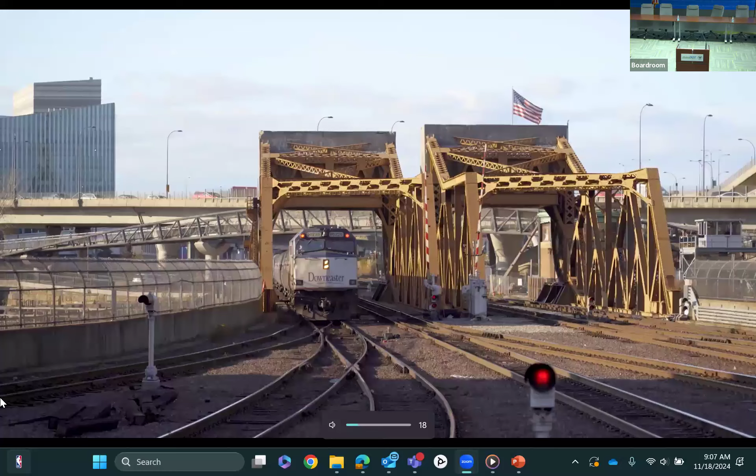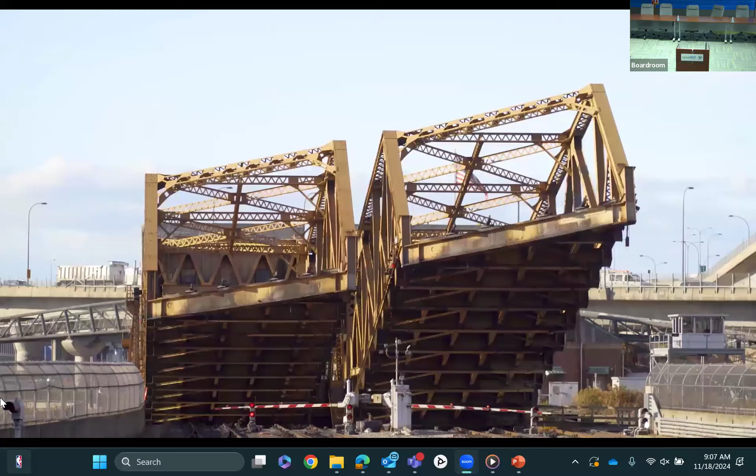Hi everyone, Phil Eng, MBTA General Manager. It's my pleasure to welcome everyone to the MBTA's Draw 1 Industry Forum. The North Station Draw 1 Bridge, right behind me here, connects the city of Boston and all the communities to the north. This roughly $1.2 billion project will be one of the largest infrastructure investments in recent MBTA history. It entails replacing the bridges, a control tower, extending the bridge platform, extending tracks to the existing network, and making various other upgrades that allow us to keep passenger service running while constructing. Today you'll hear presentations by Karl Eckstrom, MBTA Senior Director of Bridges and Tunnels. He will discuss the project in more detail, including our goals, our objectives, and the challenges that we will face together.

And we will answer your questions. More importantly, we want to hear from you. We want to learn from your past experiences in delivering similar sized, similar complex projects. And that feedback will help us develop strategies to ensure that we put out a project that can allow you to price and schedule this project accordingly.

I hope through this forum, partnerships will form from the contracting industry that will result in a better product for the MBTA and all of our riders that depend on our service to get them where they need to go safely and reliably. Thank you everyone for being here today.

My thanks to the GM. He's been a great advocate for this project. And speaking of which, one of our partners on the federal side of the house is the FTA. We have initiated a NEPA clearing for the documentation and also for the use of federal funds to help pay for this project. The FTA has been involved basically since day one with our team, talking through the challenges and the need to keep operations moving on one of the busiest stations in the Northeast.

I spend a lot of time at conferences and in meetings and speaking to groups like this about our vision for regional rail, our high-frequency, decarbonized system. And I talk a lot about electrification and power infrastructure and higher frequency and station projects. We can do all of that, and we will do all of that, but none of it amounts to a hill of beans on the north side if we don't do North Station Draw. That's the reason why it is the number one highest priority infrastructure project for the commuter rail system.

Just to give you some context, a third of our ridership and our train service is on the north side. It's 4 lines: the Fitchburg line, the Haverhill line, the Lowell line, and the Newburyport-Rockport line. It's about 160 trains per weekday out of the overall 500 trains we operate on commuter rail, and it's about 30,000 passengers per weekday.

Two of the highest ridership stations on the entire system, Salem and Beverly Depot, are on the north side. So this really is an existential piece of infrastructure that provides a gateway to the entire north side of our system to Boston. Without Draw 1, without a fully functioning operational Draw 1, we don't have a north side service. A lot of what you're going to hear about the design and the plan for the project involves replacing a critical asset.

It's also important for our plans with regional rail and higher frequency service that we increase the track capacity of Draw 1, so that even more trains in the future can utilize this critical asset to connect the north side to Boston.

Over time, our plans are to go from what's currently anywhere from 30-minute to 60-minute headways on the north side, to 20 to 30-minute headways system-wide. So you can do the simple math. Our vision in the next 10 to 15 years is to actually double the amount of trains going over Draw 1, and provide that level of service to the communities that depend on us for their commute.

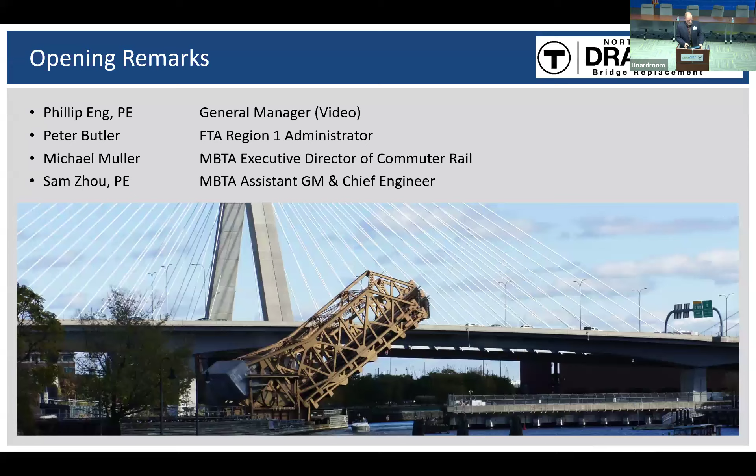For today's presentation, we'll do a quick look at the agenda. We'll talk about why this project is needed, you've heard some comments on that already. We'll talk about program goals, the project description. We'll look at some challenges. We'll talk about the funding that's in place for this job. We'll look at our NEPA review process, and then we'll talk a little bit about details for this afternoon's site tour and access to North Station.

Again, my name is Karl Eckstrom. I'm the MBTA project manager for this project. With me today for presentation purposes is Mark Ennis. Mark is the PM from STV, our design consultant for the bridge replacement. Their team consists of HNTB, the track and signals designer.

Bryan Engineering is the surveyor. We have TRC as an environmental consultant. City Point Partners / HDR is our public outreach consultant. And CNC is a DBE doing some structural computations and design efforts as well.

So we have a broad team, a lot of horsepower on the design side. I've been thankful to work with such a great group of professionals, and I want to thank them for helping us set this up today and the feedback that they're going to bring your way. So we'll get started. So why is it needed?

As Mike alluded to, this is the north side pinch point. Everything that comes into or out of Boston from that side comes across these two bridges. We have the Fitchburg line off to the northwest, the Lowell line, again to the northwest, north to Haverhill, and then Railroad East to Rockport and Newburyport. So all four lines come together to cross 4 tracks on the Charles River, and that's 8 that have to get down to 4. So you can kind of do the math that there's a constriction point. And operations becomes a challenge to get trains not only in or out of the station, but across the river.

If there's a problem with one of the bridges, it can really start delaying and altering service because only certain parts of the station go to certain parts of the two bridges. So once you get across the bridge or coming into the station, if things aren't lined up right, when you get to a certain point, you're kind of forced to go across one of the two bridges, not necessarily either bridge. That becomes an issue with our current track operations, and that's one of the items we're going to look to improve. It's not only a bridge project, but there's track and signal improvement that is much needed and desired from our operations team.

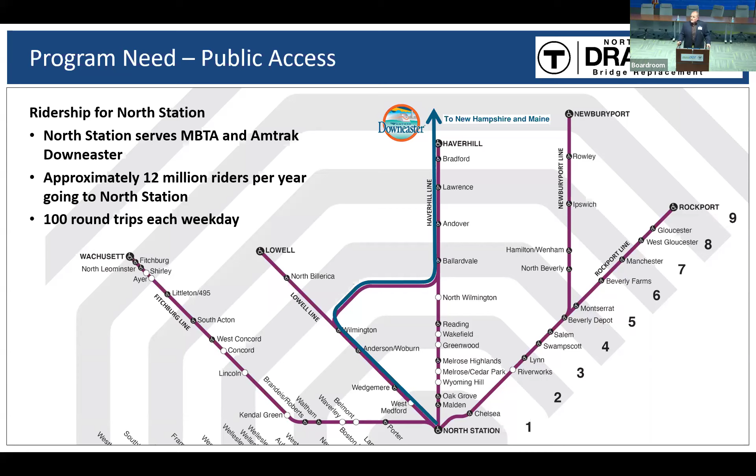We have been seeing a lot of fatigue cracking on the segmental girder bottom flanges for the track girders on the bascule span. We've been addressing those, and we have frequent inspections, increased inspection cycle. We're down to 6 months on some elements, just to kind of stay on top of conditions and be able to keep the bridges not only safe but operational, because the issues we're seeing are more impactful to the operation of the bascule span than it is to the safe carrying load capacity of the bridge.

There's been a rising cost, as I mentioned, in maintenance. In 2022 and again in 2023, we had several weekends where we were out doing steel repairs and fixing up some of the issues that have been documented in our inspection program. It seems like we're having to spend more and more money to kind of keep these bridges working while we complete the design process, and that's something that can't continue indefinitely. Eventually the bridges are going to just be no longer serviceable. But until that time comes, we're actively working on keeping them safe and reliable for daily operation.

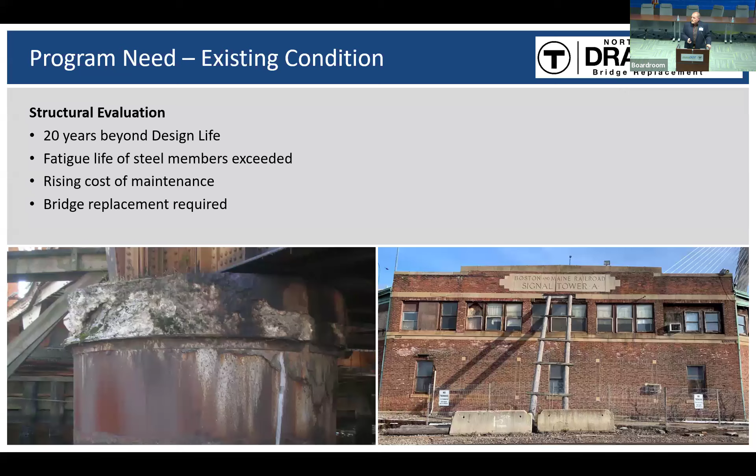went through with an emergency design and repair contract. But those are the piles that support the replacement structure on that side of the river, and they've been assessed, and we've determined that they're not suitable for reuse in the future project. So all of those piles will have to be contended with while we do the construction of new substructure adjacent to and in the river as well. So that's one of the challenges, and one of the needs is just the amount of structure that is out there carrying all those tracks.

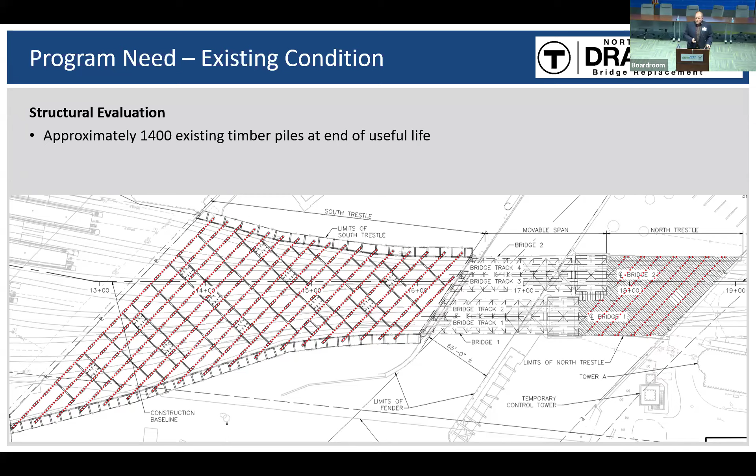We'll talk, I mentioned steel repairs. There has been a significant effort to watch and look after the bridge when it either opens or closes at the final stage. The lockdown mechanism has shown its issues with being able to operate, and we've had to do some modifications there, but the bridge really kind of comes down and sort of wiggles into place, and all of that extra movement and issues when we get into temperature extremes, either high or low, we tend to have problems with getting the bridge to seat properly. We can even see a little bit of movement at the track girders due to the way the bridge kind of shifts and jimmies into final position. So that's one of the things that we've been concerned about and watching.

I mentioned the relocation of the electrical equipment. Instead of actually moving that equipment, we're going to be replacing it with in-kind new, and being able to retire that and keep operations moving should there be issues with the building that the equipment is currently housed in.

We have done some steel repairs and other items on the movable equipment over the years. One of the other issues that the maintenance team is having is that a lot of this equipment is from the 1930s. They're not sitting on a shelf somewhere. They have to custom make or do ad hoc type things to get the same functionality but with modern equipment. So there's a real need to retire these bridges and put in a modern replacement. So that is ultimately our goal and that's our need.

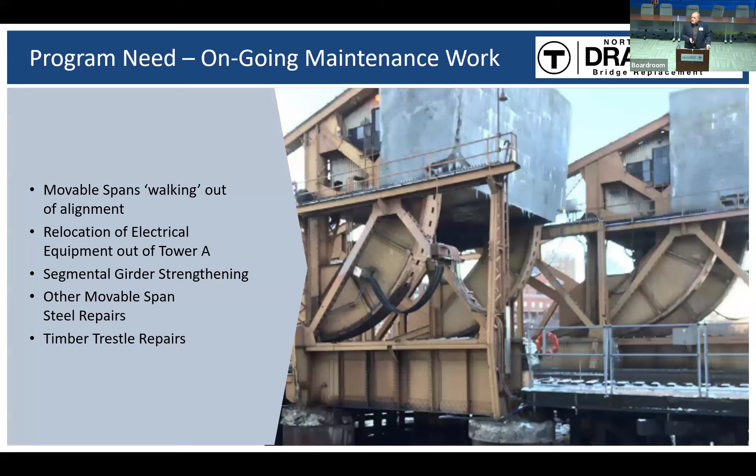We do have some repairs in mind with the timber trestles as well, just from a condition state on some of the timber stringers. That's something we're going to be looking to address in the coming future before the project gets into full construction on the south approach.

So let's talk about program goals. One of the largest things here, you can see a picture of a rendering of the completed work. Those are our 3 vertical lift spans. But those will be modern structures, and also we're going to modernize and improve operations for the signal system. Some of this signal work system has been out there since original construction. I'm told that it's like driving down a country road in comparison to some of our other areas of the railroad. There has not been an opportunity to improve track signals because of the bridges, or improve the bridge because of the track system. So that is one of the things that we've tied together: enhancing and improving operational resiliency and also flexibility.

We're going to allow trains coming in or out to cross over or realign onto other tracks, so that if one of the bridges was out for an issue, they could still get multiple lines in and out of North Station and use as many platforms as possible, rather than tying half the station to one bridge and the other half to the second bridge, which is our current condition state.

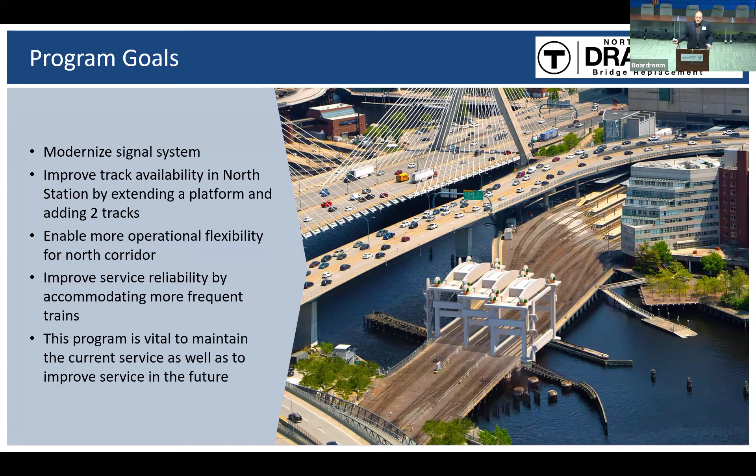So with that, I'm going to turn things over to Mark Ennis. Mark is the project manager and has been since the contract started in 2019. Mark's going to go through some of the project scope and description in more detail, and then we'll be back.

Thank you, Carl. Before getting going with the presentation, I'd like to take a moment to further introduce the design team who are here today. From STV, Marion Barth is our principal in charge, and Heather Moulton, our deputy project manager. We have HNTB here, with Brian McDonald here to answer questions as they may arise. I believe Jeff Brandt from TRC is here. Good to see you, Jeff. We have Marty Nee of HDR leading the public outreach process. And we might have Kevin Stewart here. Is Kevin here? Kevin of RDV led the effort to produce the animated rendering, which will show up later in the presentation.

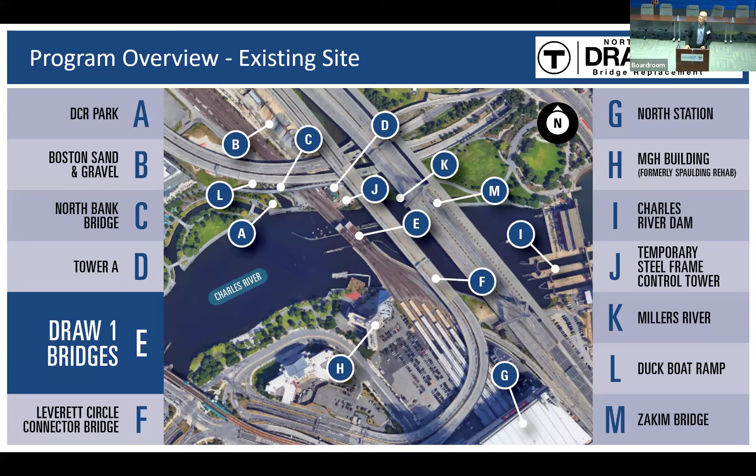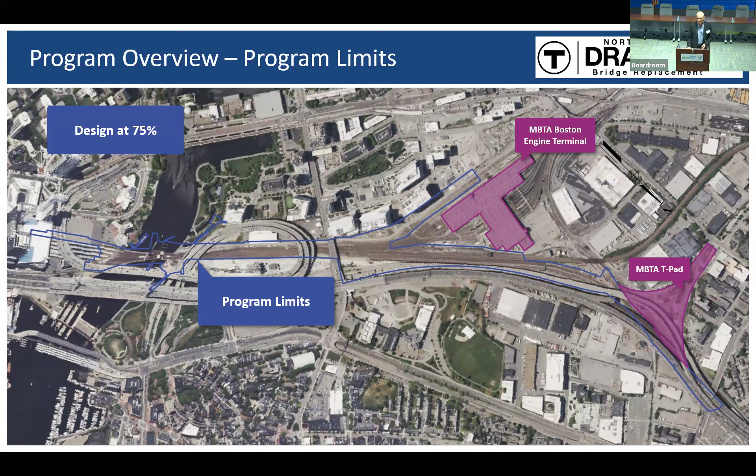This breakout of work also coincides with the latest permitting strategy that the project has. When the project was initiated, it was intended to be a design bid build project, and everything was to be permitted as a single project accordingly.

One thing to add to that strategy: one of the items we were able to show and include was that those areas around North Station and the track and signal work have independent utility and benefit to the MBTA, whether or not the bridge was done today, tomorrow, or next week. Those elements of the work would be beneficial and useful to the MBTA in our current operation. So that is one of the drivers in being able to break those out on a permitting piece, and also maybe on a potential construction piece.

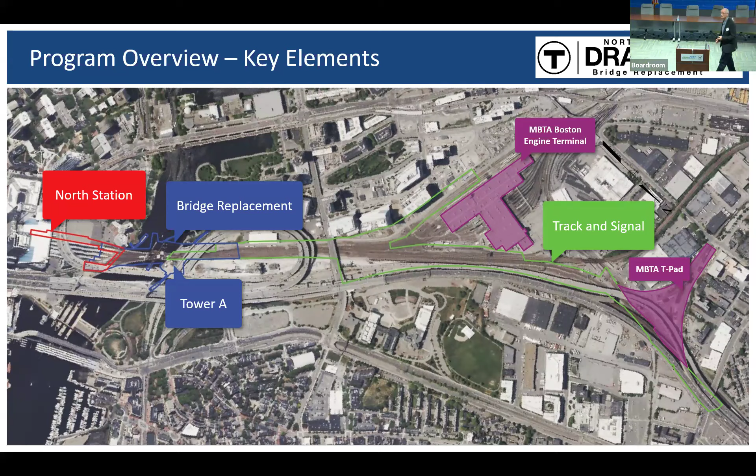Drilling down into the elements of the work, starting with the bridge. Essentially there are two movable spans at present that span the navigation channel, and this project involves replacing those two movable spans and the four tracks they carry with three movable spans and the ability for six tracks to cross the navigation channel.

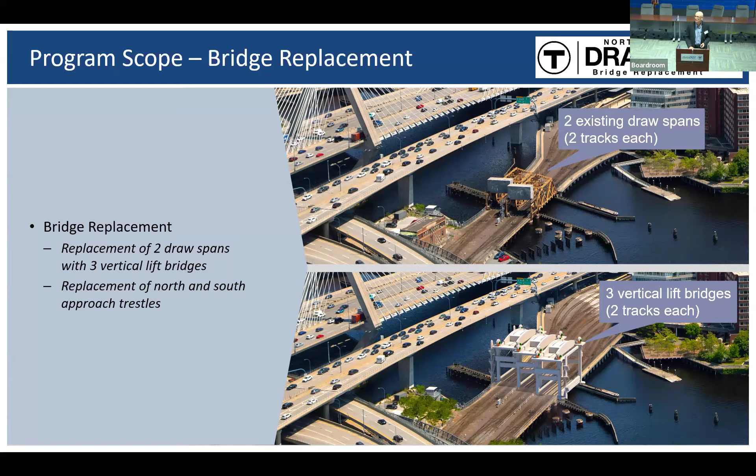As Carl stated, the south trestle had a fire back in the 80s, and the timber superstructure was replaced with precast concrete deck panels, but they are still supported on the original timber piles, and that's a fundamental problem for us.

The movable spans are 2 Scherzer rolling lifts. There used to be actually 4 movable spans at the site, and the caissons that supported the other 2, which have since been demolished, can be seen on the upstream side of the river.

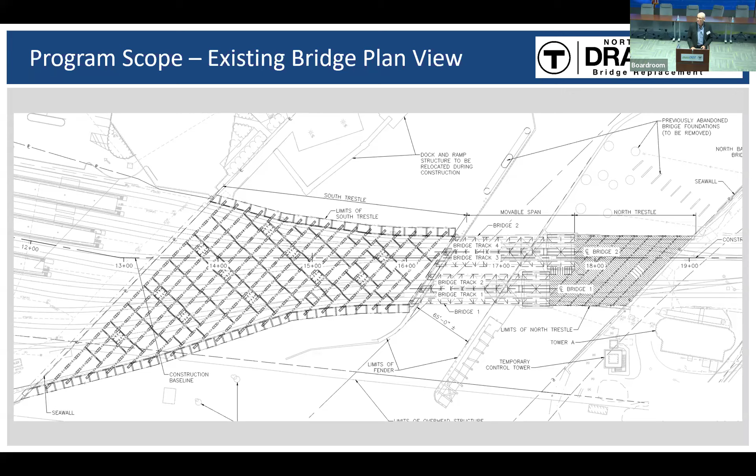Once you cross the movable spans, the original north trestle structure is still in place, and that has got a timber superstructure also supported on timber piles.

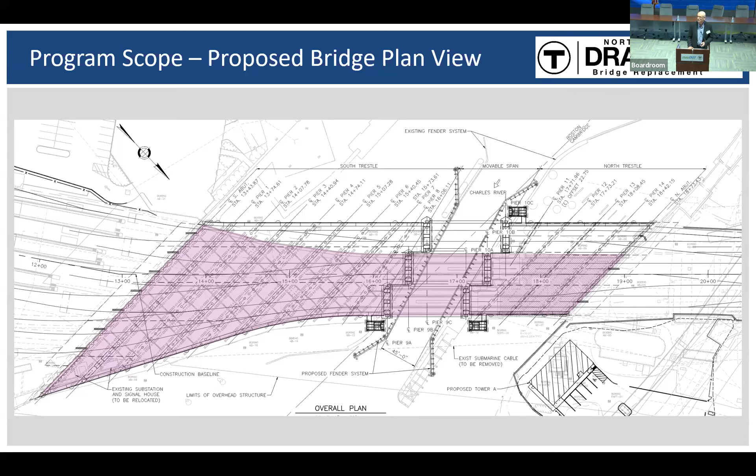Drilling into the movable spans themselves, here is a plan view of those 3 spans. The additional span, the first of the spans, is going to be built on the upstream side of the 2 existing structures, and then the other 2 spans to be installed will be installed within the footprint of the existing Scherzer rolling lifts. That is actually quite a significant constraint.

If we look back at some of the earlier imagery shown, where in our rendered views it's clear that we have selected a vertical lift type structure for the site.

And it's a particular type of vertical lift at that. It's what's often referred to as a Louisiana-style vertical lift, whereby the towers are connected by steel framing up at the highest elevation of the towers. Conventional vertical lifts often have the towers independent. One of the big advantages of that structure type is it has a very small footprint, which works well at this site.

For example, if we were to take the existing Scherzers and replicate those at this site, we would have to widen the decks to meet current MBTA safety standards for clearances. And as a consequence, those structures would not fit in the available footprint if we were to pursue that approach.

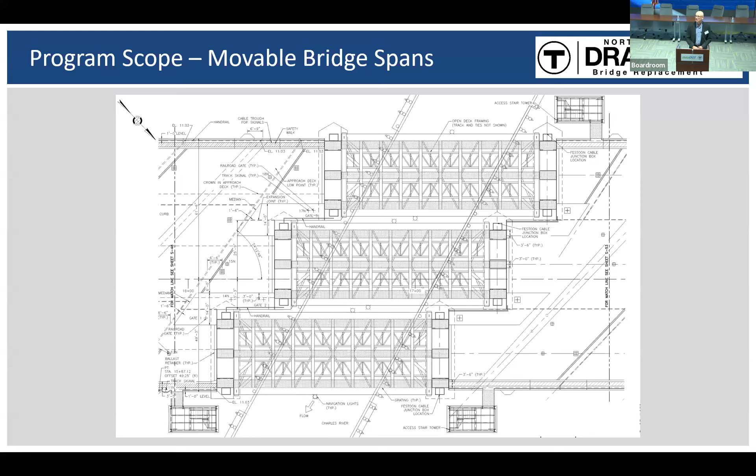So the Louisiana-style vertical lifts work well for us in that regard. Another advantage of those structures is all the electrical and mechanical equipment can be placed up on top of the framing, away from the area which is so congested at the deck level. By having that mechanical electrical system raised well up above the flood elevation, we avoid issues associated with flooding in the area. We are unable to raise the track elevation to get out of extreme flood elevations, but that's just a fact of life given the infrastructure surrounding North Station. With the mechanical electrical system set at that higher elevation, should there be an extreme flooding event, once the waters recede, we would expect these bridges would be operable very shortly thereafter.

There's going to be a lot of openings of this bridge - they average over 3,000 openings a year. So we're looking to provide the MBTA a simple, reliable system with built-in redundancy. The other advantage with one motor driving all 4 sheaves is it essentially eliminates a problem common to vertical lift structures where there's differential slippage between each end of the span.

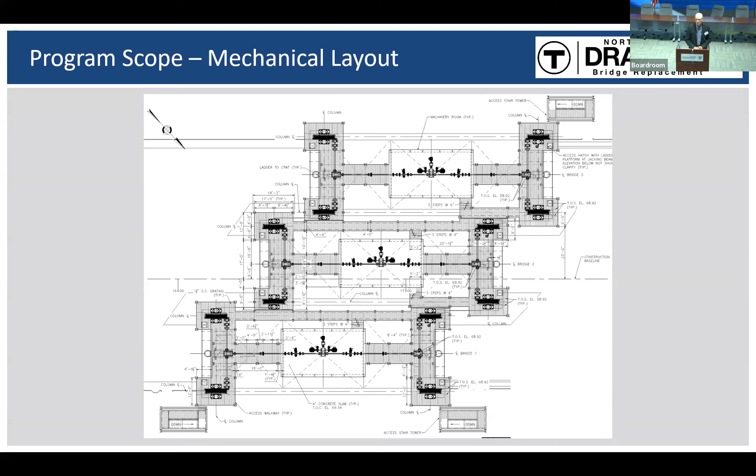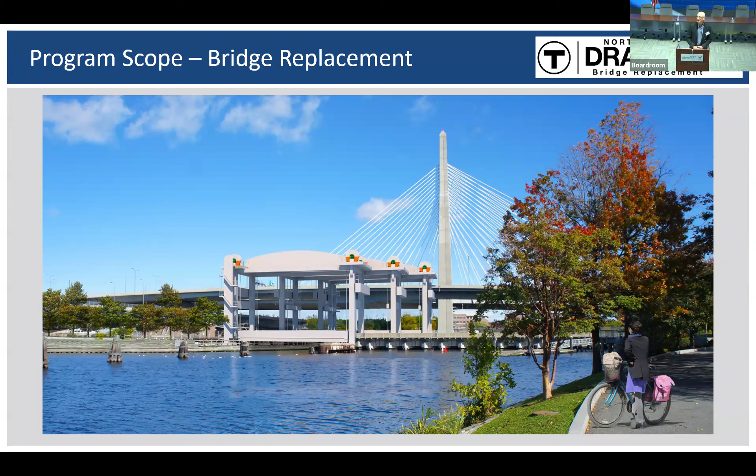Now looking from the north bank at the bridge, in this case we showed the bridge in the open position, and it's worth mentioning that the vertical clearance provided by the bridge, and the horizontal clearances for the navigation channel, have all been approved with the US Coast Guard. And they've also been approved with DCR. That's important because DCR has jurisdiction over the waterway here as it relates to navigation, in addition to the Coast Guard.

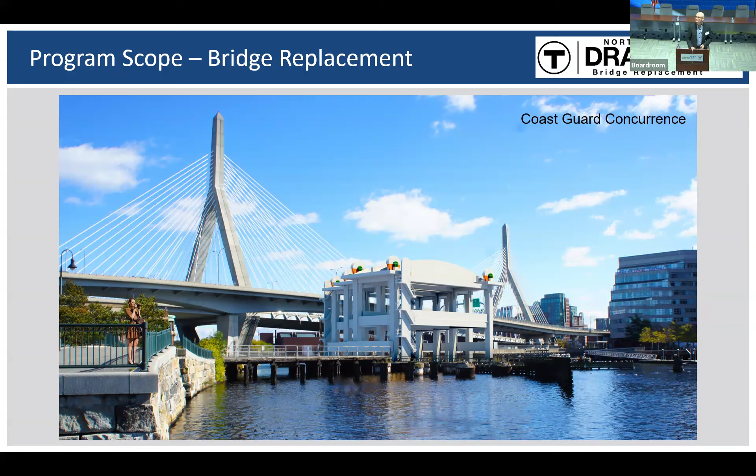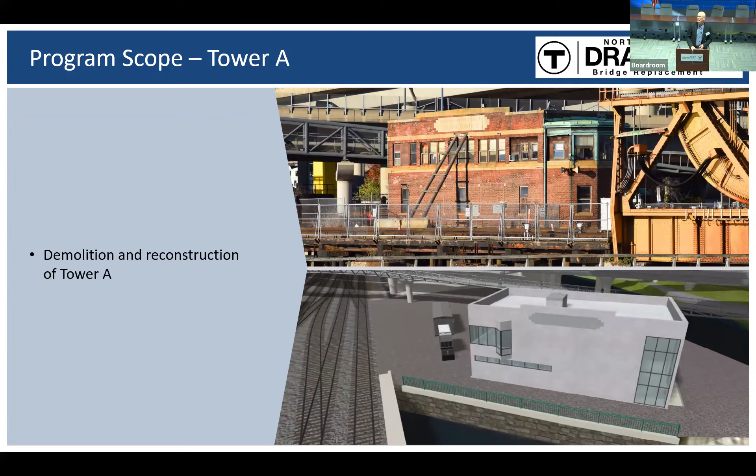Another feature that's to be fully replaced, as Carl mentioned, is the Tower A building, shown in the upper right photograph. The Tower A building, as with the two bridges in place out there, are eligible for historic registration. So any work we do here has to be vetted with the Section 106 parties. We have come to an agreement that the building needs to be fully replaced, that it's beyond salvage, as is the case for the two Scherzer rolling lifts. Down in the lower view is a rendered view of what the new Tower A building may look like.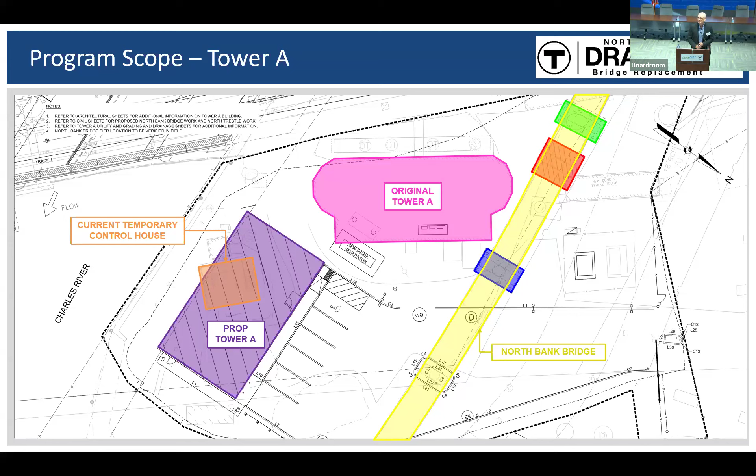Another item to mention here is there's a yellow band to the right of Tower A, and that represents the North Bank Bridge, an existing pedestrian bridge structure in place, but it presents a conflict for our project. Shown here in plan view, the yellow band represents the layout of that North Bank Bridge, and it provides connectivity between North Point Park on the upstream side to Paul Revere Park on the downstream side. It's a DCR-owned bridge, and it's a significant architectural structure.

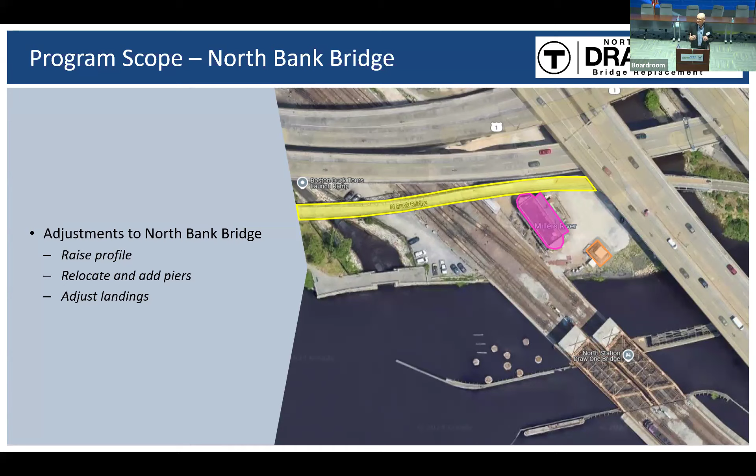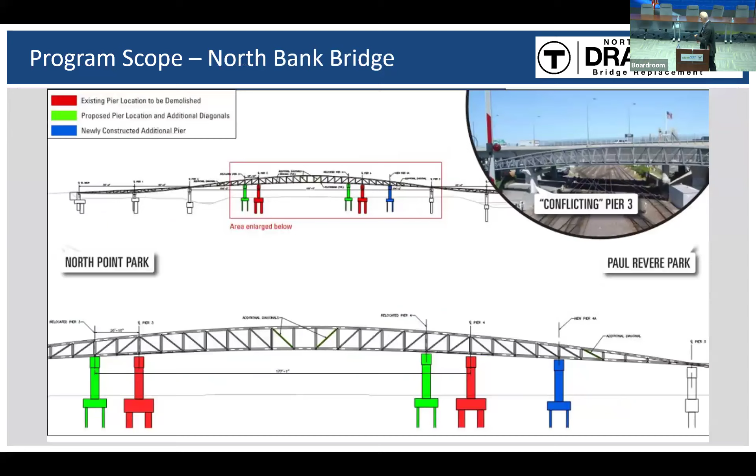Those switches will typically be number 10s or greater, which will reduce wear on the tracks and allow greater speeds through the switch areas. There will also be geometric improvements that further allow for faster speeds, so trains coming down the lines through this area will move more rapidly, reducing travel times for the public. Also achieved here is better flexibility - with the new system, trains from any branch of the MBTA line coming through the Tower A interlocking can now go to any platform in North Station and vice versa, and all trains from any platform leaving North Station can now access the BET.

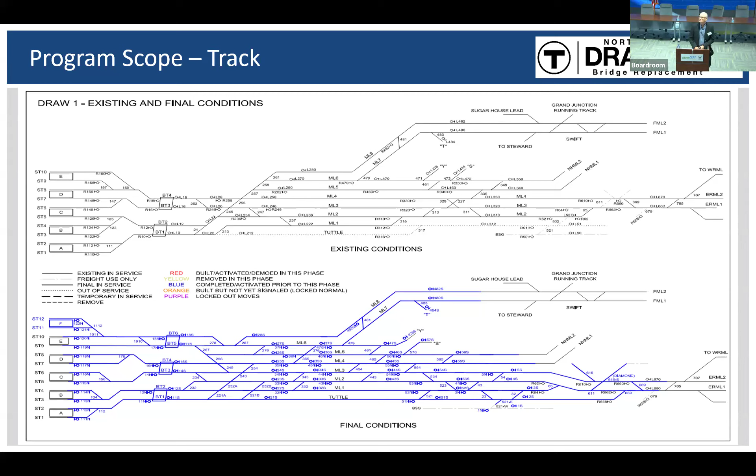To support the extensive track work, an equally large signals effort is required. There's already a contract in place, close to completion, which is upgrading the signal system in and around the North Station area, converting from analog to digital, and that will be a vital building block for the work proposed here as part of the Draw 1 project.

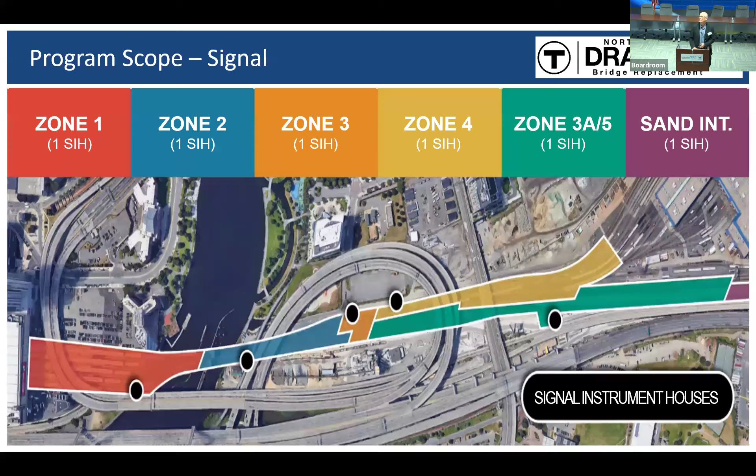The work extends through 6 zones out to the sand interlocking. Looking at North Station, as we have said, we will be installing a new platform F. In reality, some of that platform is currently in place already. Within the footprint of the North Station building, they did build a stub length of platform F.

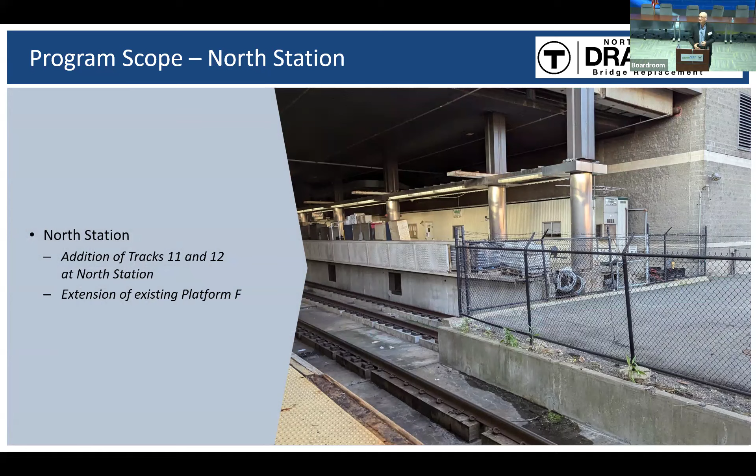This project will extend that platform out some 340 feet and allow for commuter trains to use this platform, which will account for tracks 11 and 12, which is part of the project.

Other upgrades at North Station include life safety, electrical, and drainage, but the platform here is the major part of the work.

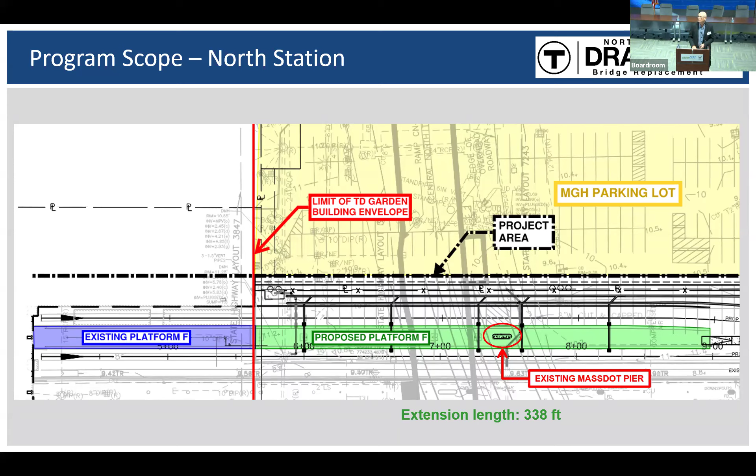Now that you've seen a little bit of the scope involved with this program, I want to talk about some of the challenges we're dealing with and how we intend to overcome or meet those challenges. A big driver, and really our goal, is to maintain operations throughout construction, and we're dealing with one of the busiest terminal stations in the Northeast.

The scope, or the requirements the design has been presented with, is to maintain a minimum of 4 active tracks across the river throughout construction. Whether it's on an existing bridge or a proposed bridge, we still need to maintain and use 4 active tracks at a minimum. We have to have a minimum of 8 of the existing 10 station tracks available to operations throughout the week.

Not necessarily which 8, but 8 has been the minimum, and we've shown through operation studies that that's our peak demand throughout the day. So we are looking at keeping that amount of the station open at all times.

We're looking to minimize the navigation channel closures required for construction operations to something that is defined and minimized, and that can be broadcast to the mariners. Our partners at the Coast Guard have been engaged with the NEPA process, and we've also submitted a bridge permit for the work, but the navigational operations is something that we cannot just decide that we're not going to provide.

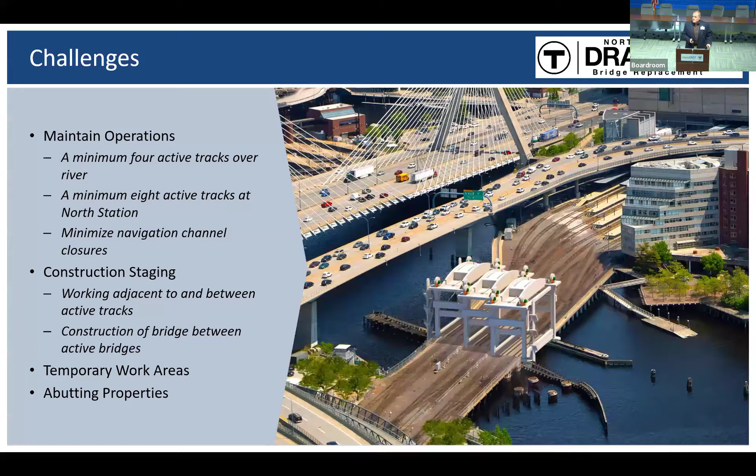I have a small video we're going to play, and while it gets queued up, this is an output from our track and signal designer, HNTB. They have a railroad operations modeling group, and they have this software that has been utilized as part of our operational studies. I'm just going to let it play in the background. We'll talk through it a little bit, but essentially what you're seeing here is movements of vehicles in or out of North Station.

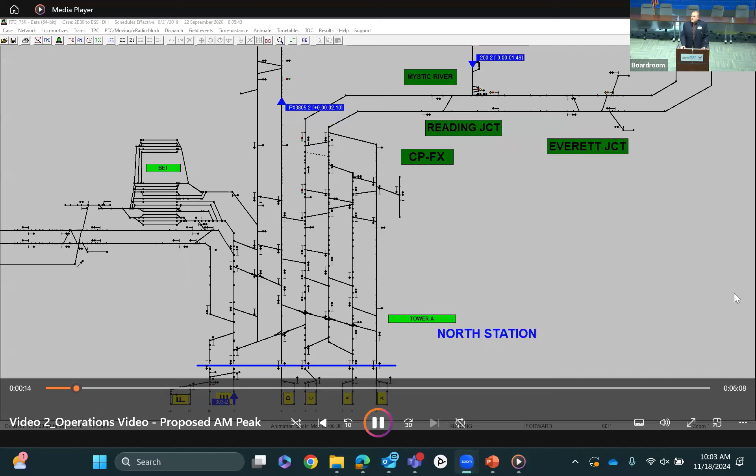This is kind of the final condition with the three bridges in place. You can kind of make them out right about there. And then you can see the platforms are labeled right to left, A through F. So our platform F is now kind of part of the final puzzle. And while this shows the movements coming in or out of the final condition, we've done a similar study and a similar amount of work for each of the stages and operational changes that are required to implement the bridge construction and some of the significant signal and track work north of the plant.

So these studies have been not only a pre and post, but also a during. And those numbers have been shown to validate and provide our operational performance throughout construction. A great deal of work has gone into that, making our partners in operations aware of how we're seeing this thing get built and implemented. So I would just want to give a glimpse of that.

I can't pretend to give you what all the different colors mean, but they are representative of an important piece of the operation in terms of the train movements. But you can kind of just see how the dispatcher will be able to have that many more switches and crossovers and movements to get through.

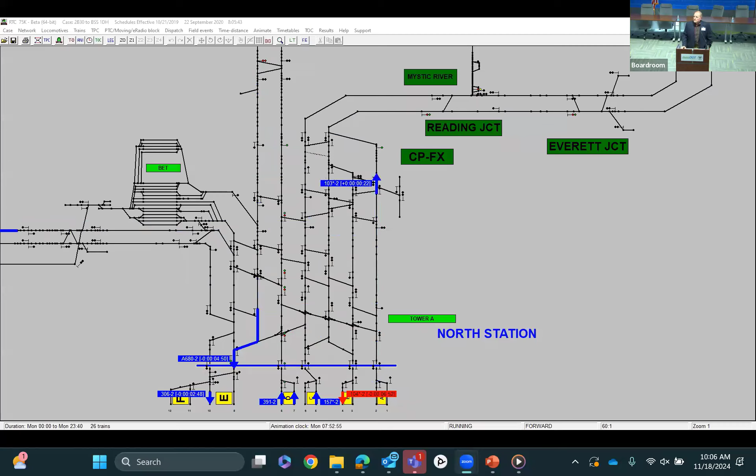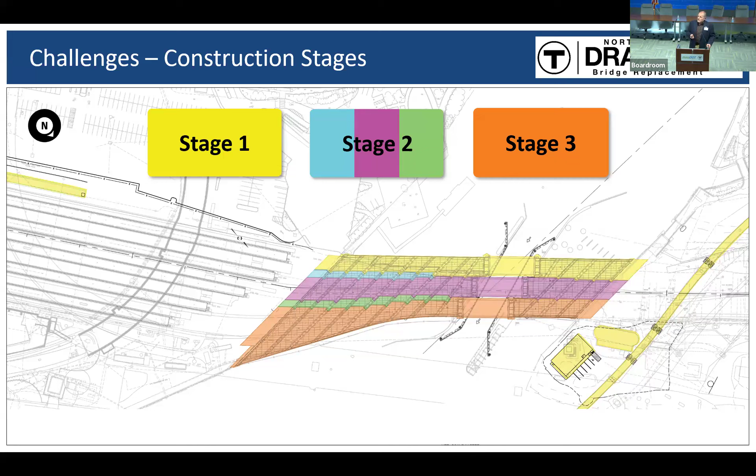In the final stage 3 for the 3rd bridge, we're seeing that being about 2 years, so all in, we're at 7 years of construction. There's probably some ways that could be thought to change that, but in terms of our design and the way we've papered it to date, that's kind of the number we've been able to use for cost and also for presentation in the materials for the NEPA documentation.

So let's talk about the track and signal stages. We've aligned certain things to operate with the bridge staging, because in order to get trains to the 3rd bridge, there's certain items that we have to do in a certain order. You can kind of see we have almost 14 track and signal phases or sub-phases within stage 1, and that just gets us to the one new bridge.

There's 24 elements of specialty track work installed during that stage, and as Mark showed on the track signaling diagram, we're touching 7 different zones. That's just stage 1, and then it almost doubles for stage 2 - these are cumulative numbers, mind you. In stage 3 a little bit less, but as I said, when you start to do the math, there's a lot of intricate numbers going at us in a lot of directions. Just the number of stages, sub-stages, and phases for the track and signal components to fit within the bridge work is almost staggering.

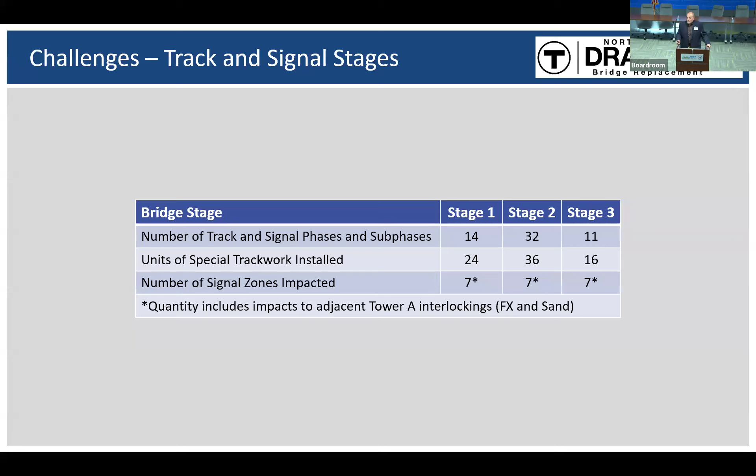The plan set, as it was developed for 75%, is something that is more than an afternoon's pleasure reading. It's just a lot of material that's been put forth for this project already.

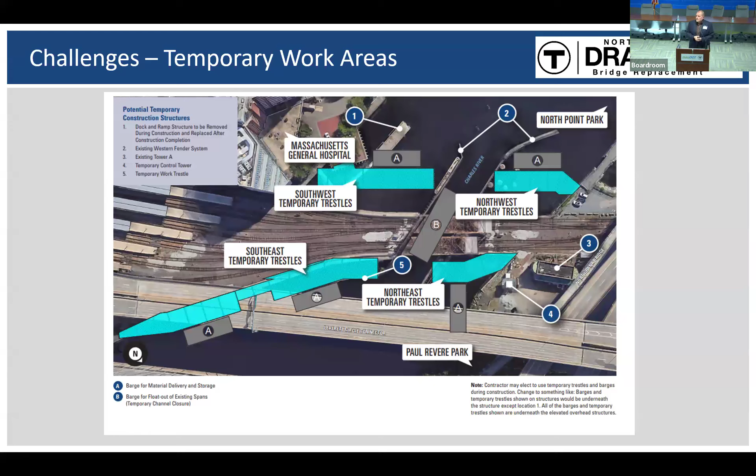You can also make out that we've included the space for the third bridge within that trestle structure between the existing bridges and the western or upstream direction. That is to allow that work to happen offline and be available to the contractor from jump. We have some renderings of that coming forward in the presentation, but that's really the challenge of this project, I think - how to build what we're going to build in the space we have to build it, and keep trains moving throughout.

To that end, we've worked with some construction engineering professionals that have been brought onto the team. Genesis Structures has been part of the analysis and thought process going into the constructability of this project. We've developed and are working through getting project-specific Railroad Directorate parameters that would allow for special construction rules at this site. If you've worked for the MBTA, you know that one of the challenges is to operate equipment adjacent to or over top of our trains or tracks that are supporting our trains.

A lot of times the site is, you can only work in the off hours, or you can only work when there's a diversion of rail traffic. We're not going to be able to divert all of North Station. And for certain pieces of the work, we're going to have an understanding and a safe way to build it.

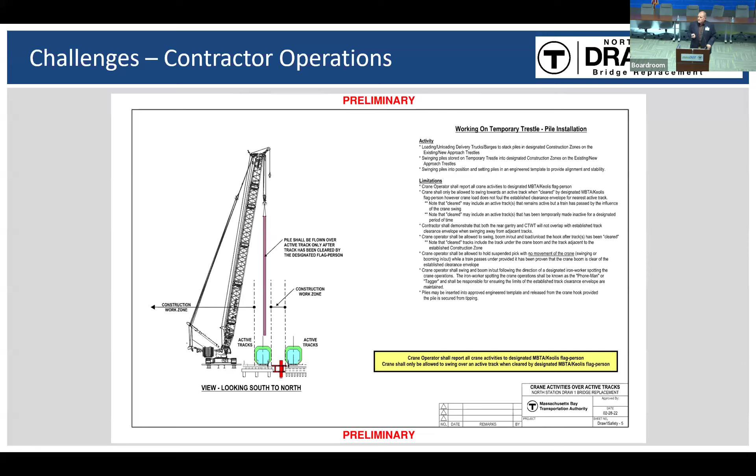So it's going to take longer, but it's going to be doable, and it's also going to be safe for all components. So again, those are something that we've worked hard and coordinated with a lot of folks to understand the construction activity and also the operational constraints.

Again, here's another picture with same crane operations and the like, or equipment on temporary works, but really the challenge is to identify and set limits on the crane booms and things to stay out of the clearance envelope of the train, so that if you had a load on a hook or you had a crane boom in position and work stopped, you could temporarily let a train go through without impacting that clearance envelope in all directions, in all tracks.

So again, this is something that has been well-developed and something that we would look to share with the contractors community before or during the bid phase.

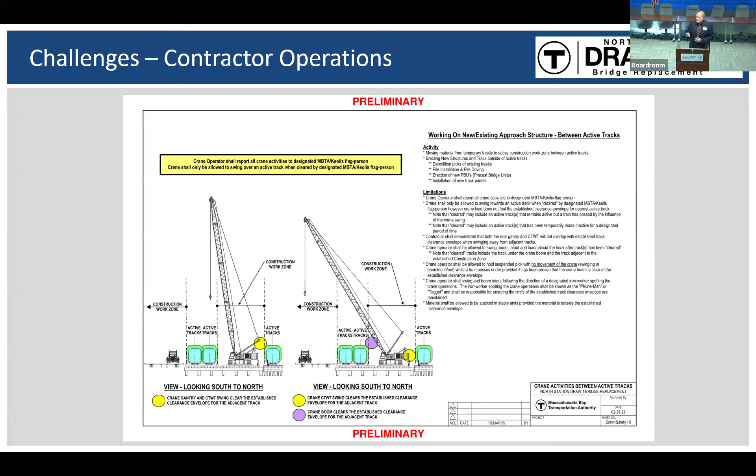The Leverett connector does do a big run around and comes back. So if you're coming across the Tobin and you want to get into Boston, you've got to go underneath the Zakim and around the ramp structure and then come southbound into the city. And there is a direct exit onto Nashua Street just to the west of our site. So it is a challenge to kind of deal with overhead vehicles.

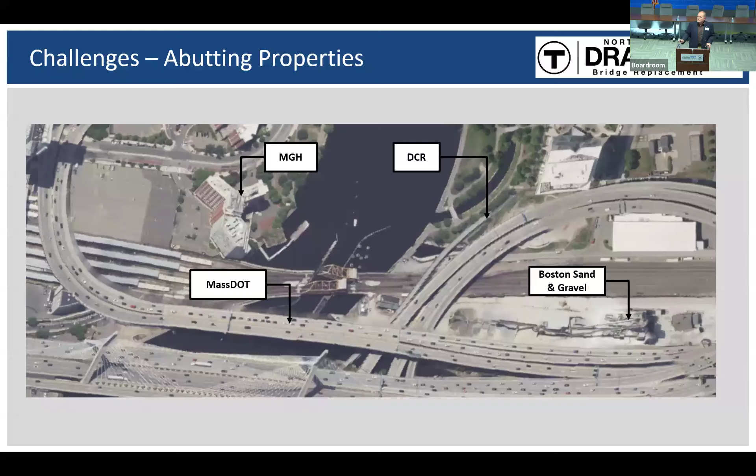And now we're going to get into our third video. We have, as Mark mentioned, RDV has helped us develop a rendered model space for the project.

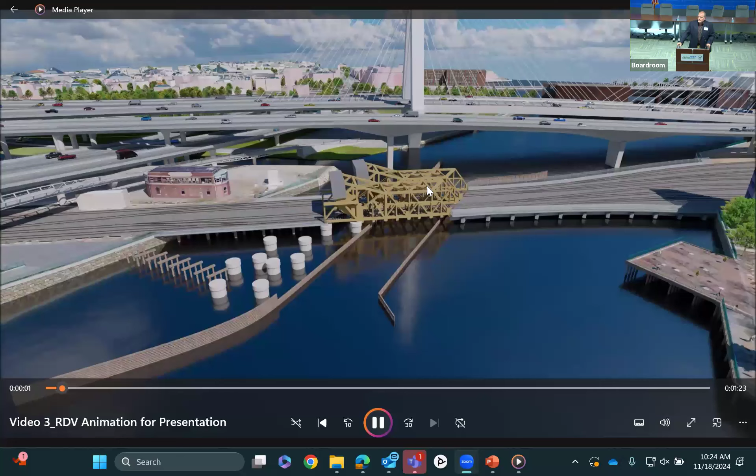This includes not only proposed work, but it also looks at some of the existing features. So we're just going to take a little ride through. This is existing bridge. Those are the existing caissons for bridges 3 and 4, which no longer exist, but we'll be removing.

Here we're looking at some rendered views of equipment and temporary trestles. There's the framing for the first phase work, this is during, and here's the completed work. As Mark mentioned, some of the rendering framing up on top is the same framing. Some of the architectural features are a little bit different, but that's the entirety of the 3 bridges in place.

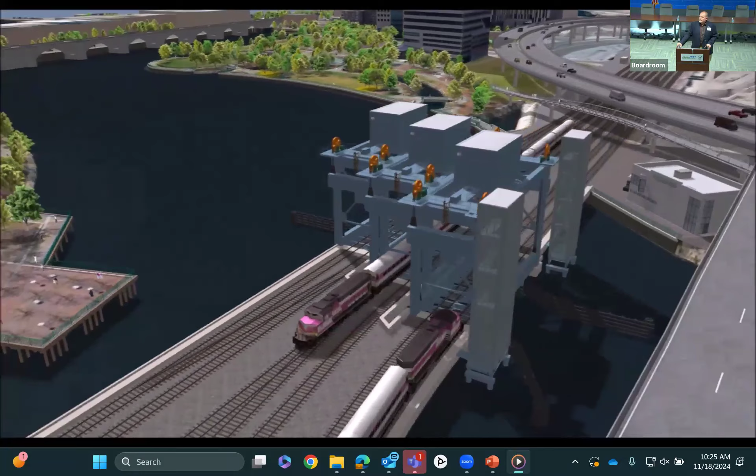This is all done through a BIM model, so it's all spatially relevant and correct, and it allows the model to be viewed from many different angles, and it stays in proportion. It also allows us to develop videos and flyovers.

Here's coming in from the north. There's our 3 bridges, the new tower, and we're coming into North Station. You can kind of see the new stub platform F there, and I'm told that this hashtag even brings us right to the MBTA website for North Station Draw 1. So as I was showing it to somebody, I got the comment, sick.

I don't know if that means a lot to some of the people in the room, but for the younger generation, it's pretty cool.

And that model and that space will be available to the public when we release it. It'll be something you can look at on your phone, and you can drill into different parts of the project. It'll be a great teaching tool and talking tool. So my thanks to the team for highlighting the need to and the desire to make that available.

It's been helpful in showing people, and even in this group, the complexities of the work, but also just the new technology that's behind some of the design that we've developed to date. Our plan is to keep that active and have a website access to the public and the partnerships that we developed for the work.

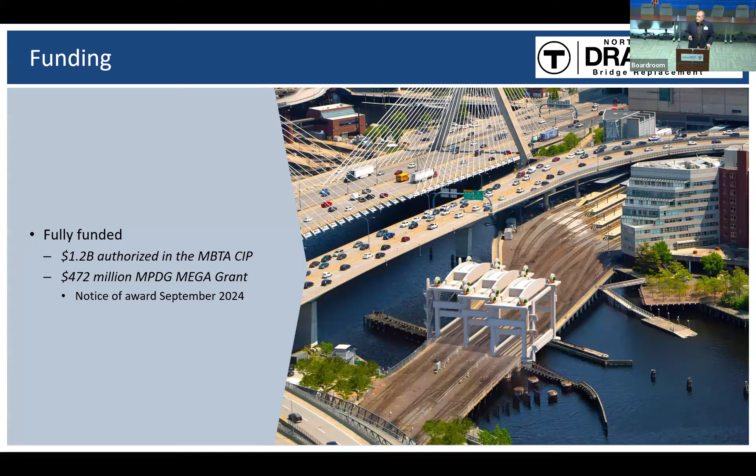I'm going to give things back to Mark. He's going to talk a little bit about the NEPA review process and status.

The good news is we're close to the finish line here. Yes, we are going through the environmental process at present. Certainly the critical path for the project is the environmental assessment associated with the bridge work. We are making good progress there. We have just submitted a draft for the FTA to review, and that review is currently ongoing.

A critical part of the NEPA process is the Section 106. As we mentioned, the original structure developed as shown in the RDV model was a little more engineering driven without an architectural touch, and through the efforts of Miguel Rosales we have adjusted the appearance of the bridge. As we have shown today, the structure in the earlier renderings has been reviewed and accepted by the Section 106 parties and is going to be written into a memorandum of understanding, which is just about complete.

There's been extensive outreach performed to date. Carl was showing some of the critical abutting stakeholders, DCR, Boston Sand and Gravel, MGH, MassDOT, and so forth. Those outreach efforts are ongoing. There was a public meeting held back in June of this year, and we expect at least one more public meeting coming up, probably in the range of January 2025. That's being coordinated at present with the FTA folk.

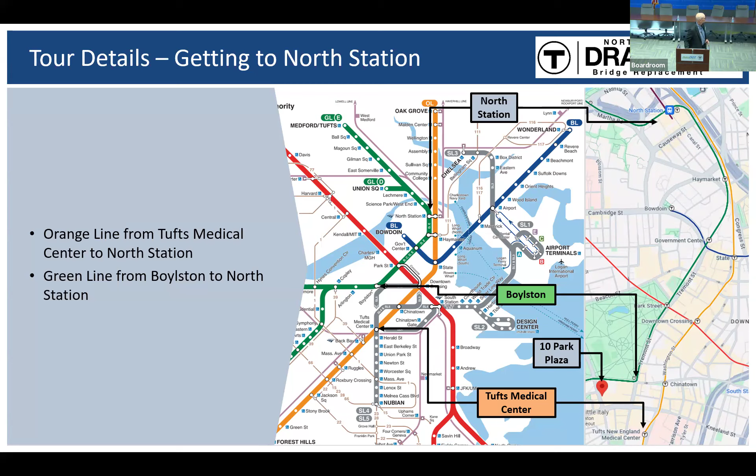Once you get to North Station, we ask you check in at the fare gate location. Amelia Cruteau, the MBTA project manager working with Carl, will be there to greet people and register everybody's arrival. Aluchi Aniachuku from STV will be there as well. Look out for those individuals—they'll be wearing yellow vests, which will be another way of recognizing these folks. They'll be right at the fare gate and will have the ability to get you through as you may need.

Sam, I'm not sure if you're going to be able to join us today. We hope Sam and Carl Ekstrom from the MBTA, Nick Altabrando from our National Bridge Practice, Bill Goulet the project engineer, and Heather Moulton the deputy project manager will be among those stationed, and we'll all be wearing bright yellow jackets or vests for identification.